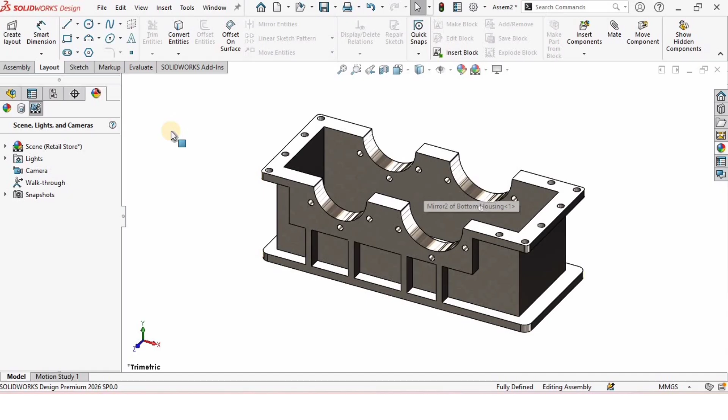So let's begin. Open a new assembly file, then go into the directory. This directory will automatically get open. You have to go into the folder where you have saved all the parts and place this bottom housing here. Then go to assembly and select insert component, select the top housing, and place it over here.

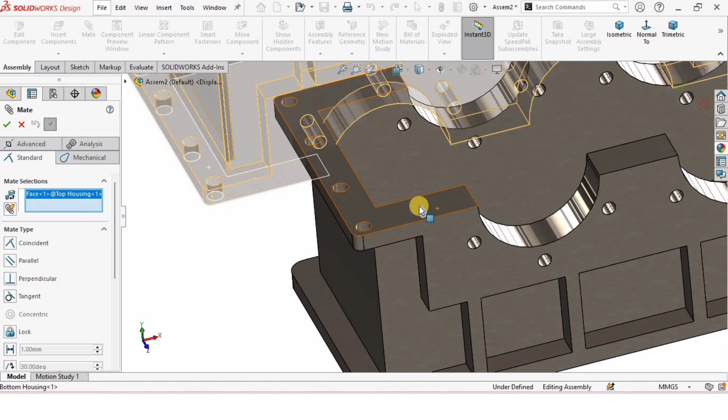Now let's assemble these housings. Select the mate, and then I will select this bottom side of the top housing and this top side of the bottom housing, and check the box.

Now let's assemble from the side like this and from the other side. So I will select these two sides and check the box. As you can see, they are perfectly assembled, and they really depend on the smaller side and the bigger side, which I have talked about in our previous tutorials.

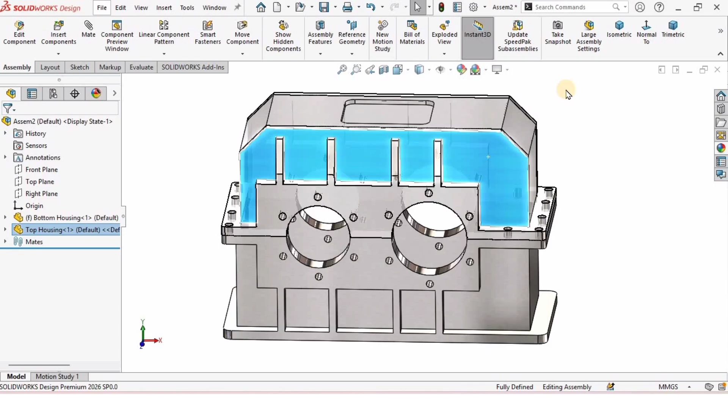So I will hide the top housing, and if for example you want to reappear it, you can show it like this, but I will hide the top housing from here. Then select insert component again, and this time I will select the input pinion shaft.

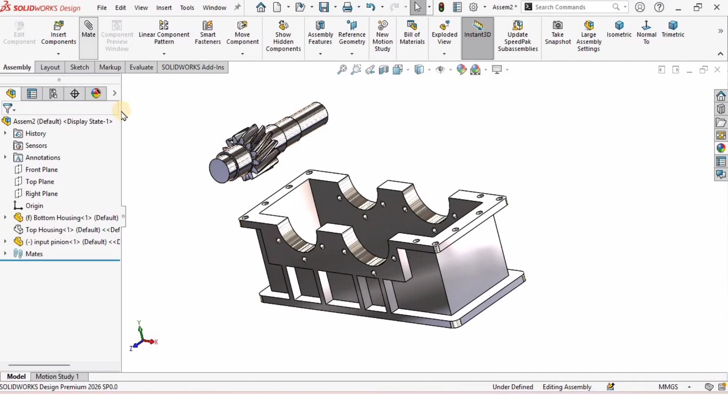If you want to rotate it about the y-axis, x-axis, or z-axis, you can rotate it like this. Otherwise, if you don't want to use those axes, you can use the rotate component option.

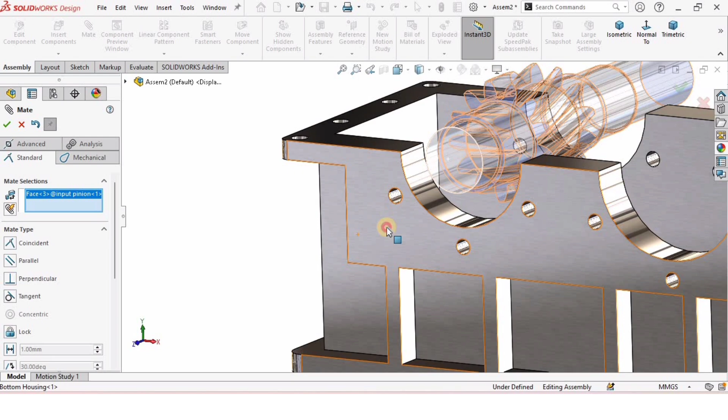Now select the mate, make sure this is clear first, then select this one and this surface, and check the box. Now we have to fix one side of the shaft with one side of the body of the housing. So I will select the smaller side of the shaft face and this side of the bottom housing, and check the box.

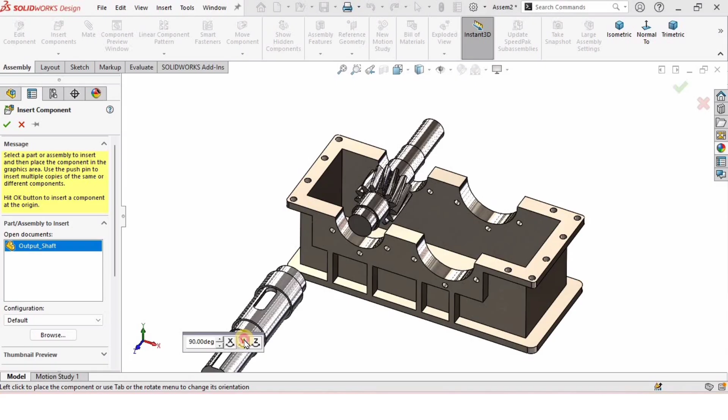Now insert component again, and this time I will select the output shaft and click on open. The output shaft will be assembled on the bigger side of the bottom housing, so you can rotate it like this. Make sure the orientation is correct, with the output shaft on the bigger side and the input pinion on the smaller side.

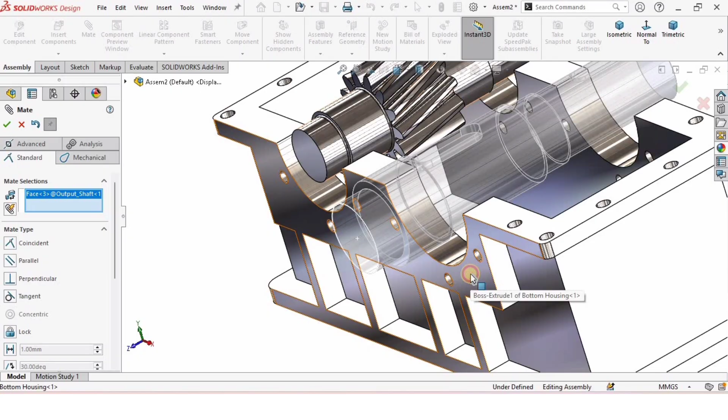In mate selection, select this surface of the shaft and this surface of the housing, check the box, and similarly select this face of the shaft and this face of the housing, click on mate, and check the box. So they are assembled now.

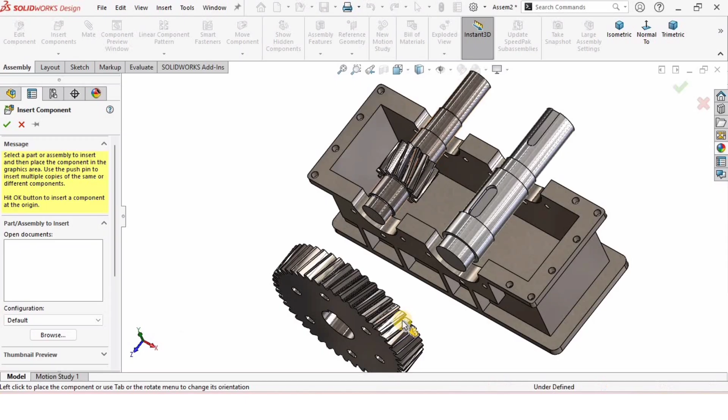Again I will select insert component, and I will insert the output gear. As you can see, this is the part file. Click on the open button. You can rotate it using the Tab key, or use the rotate component command as explained earlier.

Select the mate, and in the mate selection window, make sure this is clear first, then select this surface of the shaft and this inner surface of the gear, and check the box.

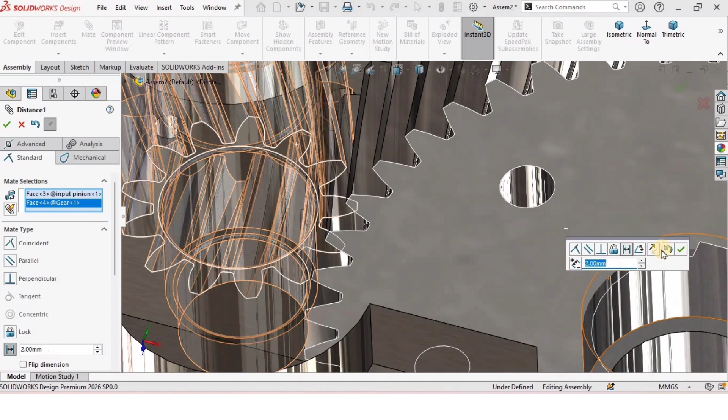Then I will select this face of the pinion and this face of the gear. I will select distance mate here and specify the distance as 2 mm, as you can see from here, and then check the box.

So they are assembled. We only need to apply the gear mate. So select the gear and you need to select the normal to option. Then move the gear so that they are not colliding. As you can see, there is a gap between the teeth.

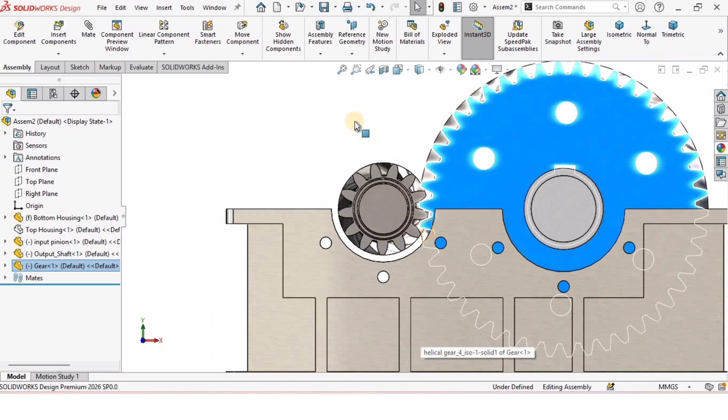After that, rotate it like this, select mate, go into mechanical mate, select gear mate, make sure this is clear. First I will select this face of the pinion, as you can see from here, one selection, and the second selection is this face of the gear.

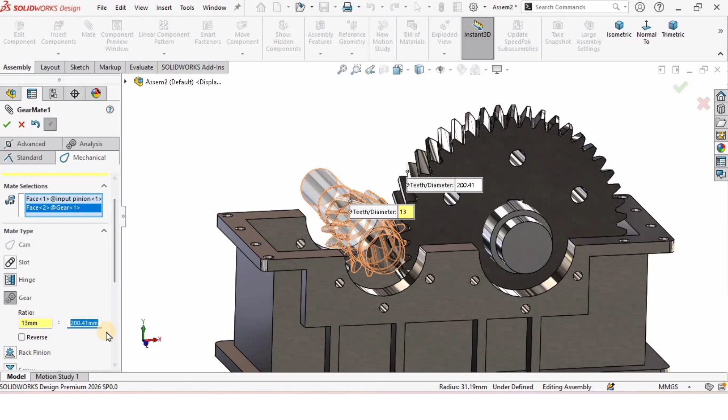Then come down a little bit, and if you have selected the pinion first, you need to specify 13:46 here, and check the box.

When you rotate the gear, let me rotate it, they will rotate together. The pinion and the gear are now rotating together, which means the gear mate has been successfully applied.

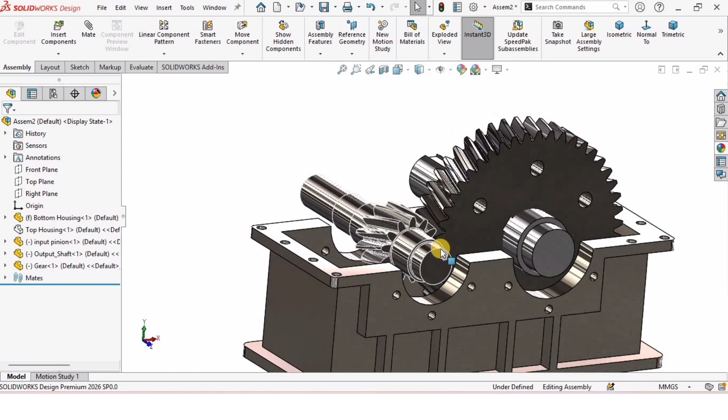After that, now let's assemble these correctly. So I will select the mate and go inside advanced mate, then width mate. In width mate we have two selections.

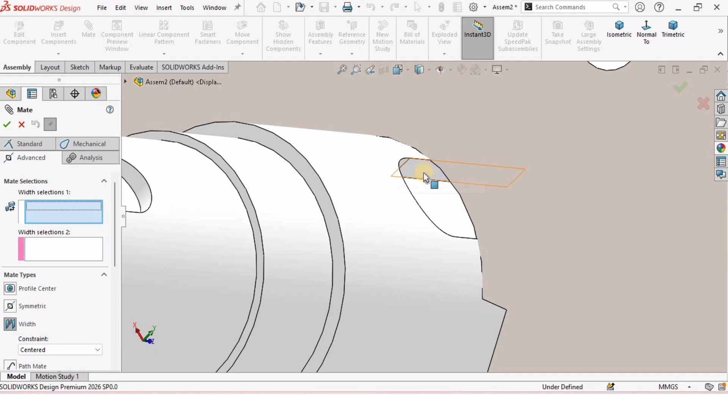The first selection, I will select these two faces of the shaft keyway, as you can see from here, and then I will select the keyways of the gear side, and check the box. As you can see, they are correctly assembled. If I rotate the gear, it will rotate perfectly along with the shaft.

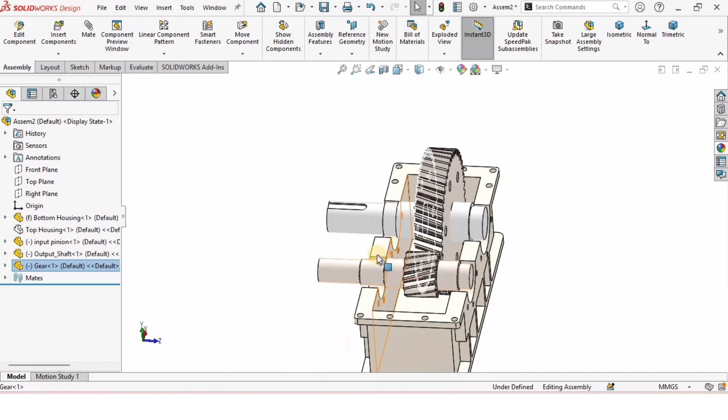Now let's go to the toolbox, select add-in one, then go into DIN because we want the bearings. Select the bearings from here, select the ball bearings, and I will drag the radial contact ball bearing. First I will select 6207.

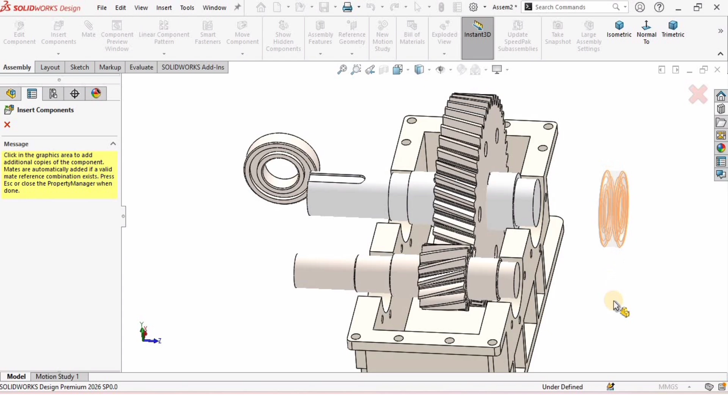I will find the size from here, 6207, and it really depends if you want to change any option. I'm not going to change any. Another bearing will automatically appear, so you need to place it over here, then press escape.

After pressing escape, now let's assemble the shaft with the bearing. So I will select these two circular surfaces of the bearing and the shaft, then the inner wall of the housing and this face of the bearing to get assembled properly.

Similarly, I will select the inner circular surface of the bearing and the outer surface of the shaft, and I will assemble it like this with the wall of the housing.

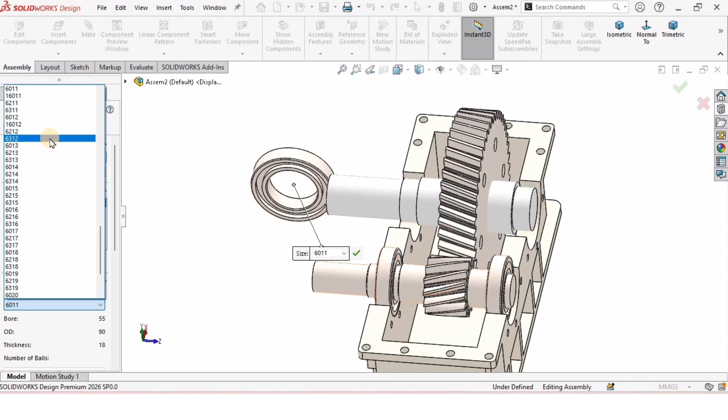Okay, now as you can see, they're working properly. Again, I will select the bearing and drag the same bearing here. Just I will change the number, so this is going to be 6011 this time.

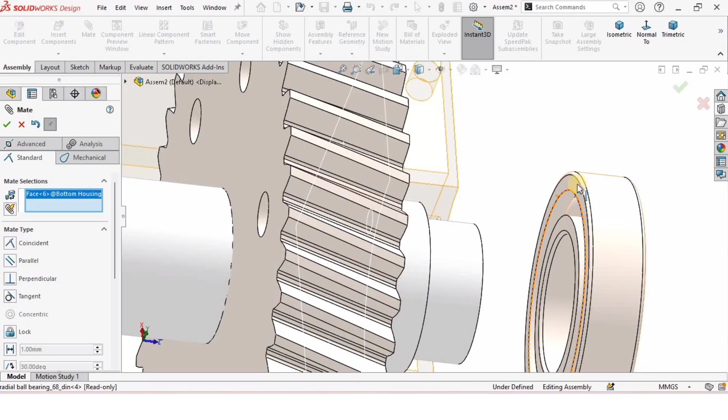Then check the box. We want another one, so it will allow us to place another one. Then I will press the escape button, select the mate selection, and similarly assemble the bearings with the output shaft. I will select this outer surface of the shaft, inner bore of the bearing, then inner wall of the housing, and this face of the bearing.

To get things assembled properly, after that I will cross this window from here. Now as you can see, all of these things are working properly.

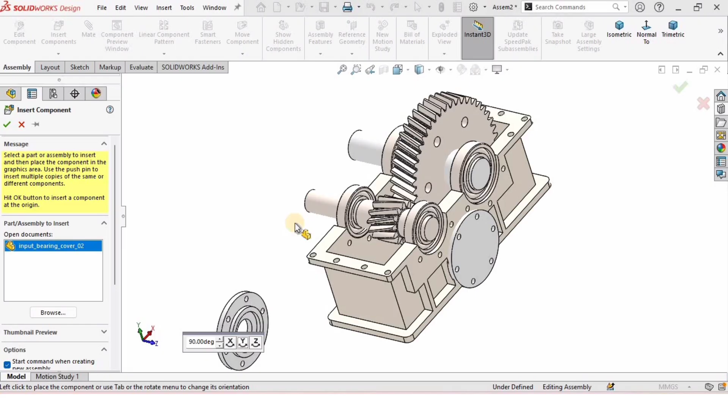Now I will select the insert component again, and this time I will select the two things, input bearing cover number 1 and 2. I will rotate it as per this y-axis and place it over here. For my first click, the first cover will be placed, and on my second click, the second cover will be placed. Or you can either place it one by one, it's up to you.

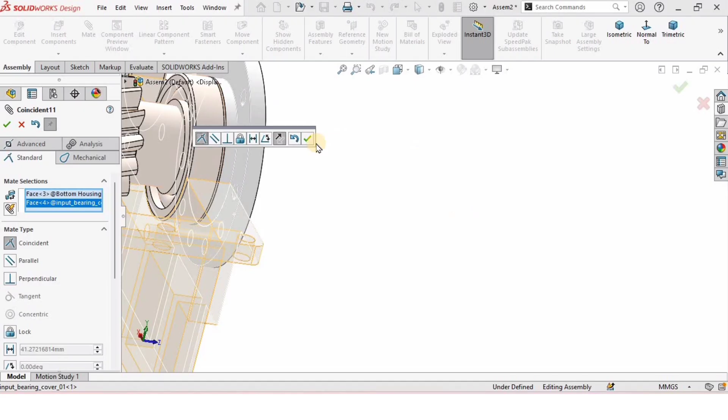Then select the mate and then select the circular surface of the shaft and the circular surface of the bearing cover. Then I will check the box and move it away. I will select this surface of the housing and this surface of the cover, and then again check the box. So they're assembled.

I will rotate the cover a little bit, then in order to properly assemble it, I will select this hole for the housing and the inner surface for the cover, and check the box. Now let's assemble the other cover.

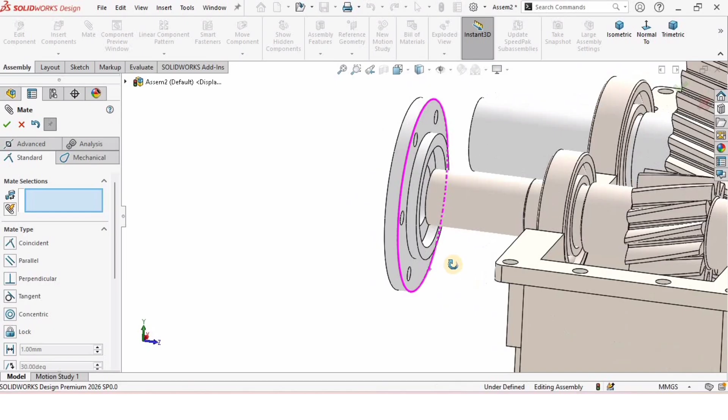It's going to assemble almost the similar way. This surface of the housing and this surface of the cover, and then check the box. This is assembled properly. Just one more mate is required, similar to the other one, the inner holes, so that they have proper alignment.

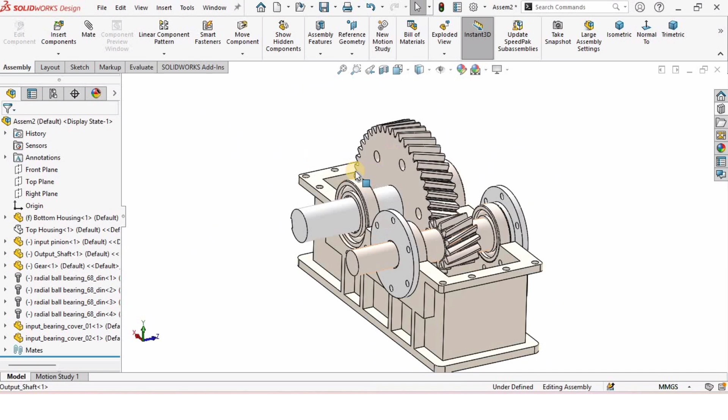Okay, and now it's time to assemble the output bearing covers. So I will select the insert component button. I will select these two output covers and place them first here in the environment. I will use this y-axis for the proper rotation.

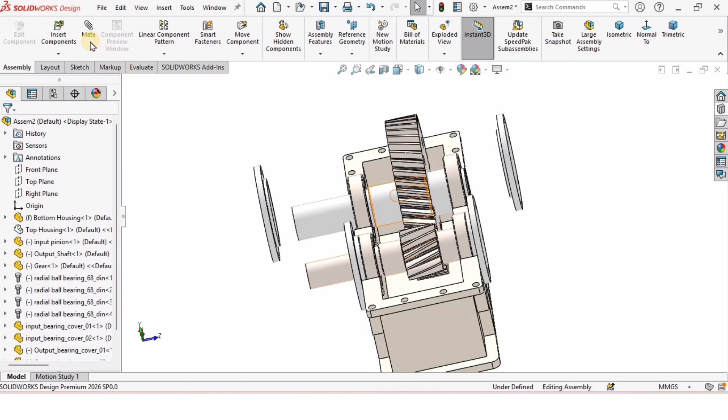Similarly this one as well. Now let's assemble both of these. I will select the mate. So in mate selection, I will select the circular surface of the shaft and any circular surface of the bearing cover.

Very much similar to what we have done previously with the input covers, I will assemble the output covers.

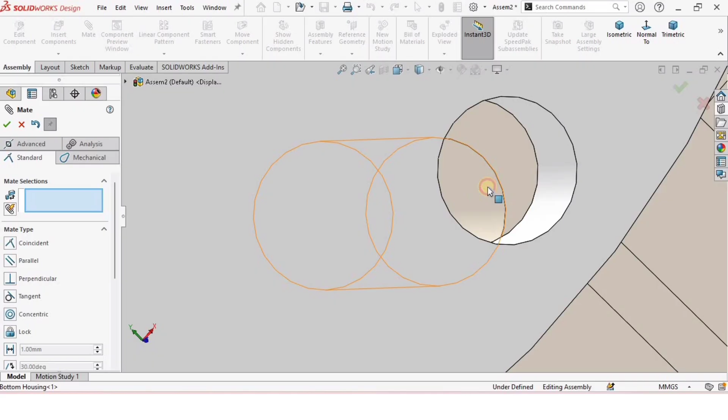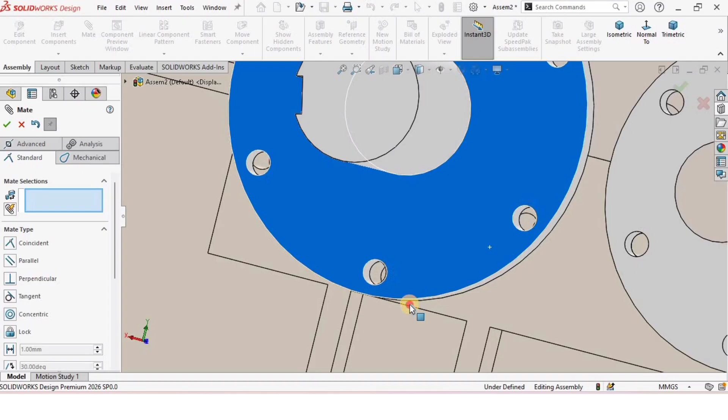Okay, now let's move on to the final cover, and let's assemble these. First select the circular surfaces and then select the faces, and for proper alignment make sure that the holes are correctly aligned so that these covers can be fixed with the bolts properly with the housing.

Okay, so they're properly assembled. Now let's unhide, or you can say show, the top cover. Let's turn on the real view graphics if you have it.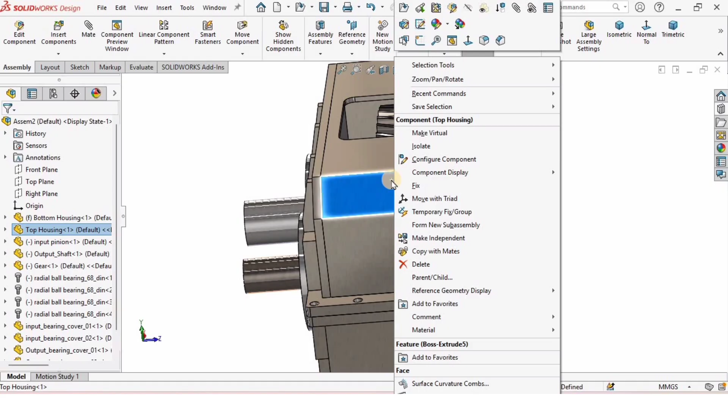Now let me make it transparent. The top cover I want to make transparent because I want to show the moving gears, but I also want to show the top cover as well. So now let me save it first, I will save it here as gearbox assembly.

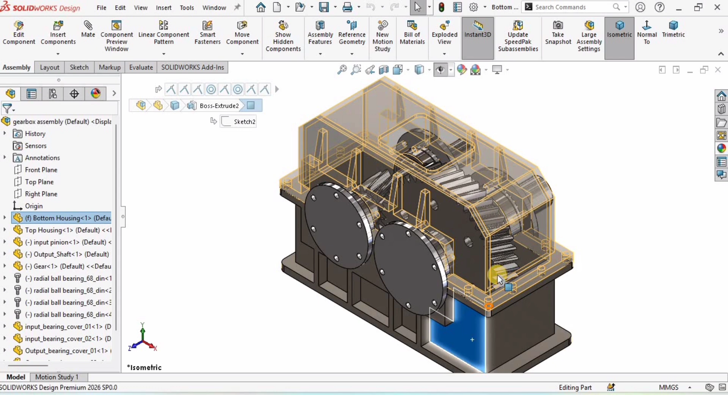And even at this stage, if you want to change the color, you have to open the part separately. Then you need to remove the previously assigned color. I will remove this color which I have previously assigned, and you can apply any color you like. It's up to you, this is an optional thing.

If you want to apply any color, for example I want to apply this blue color, I will press Ctrl S and save it. So I will change all of the colors. As you can see from here, I have changed all the colors, and you can apply any color you like. It's up to you.

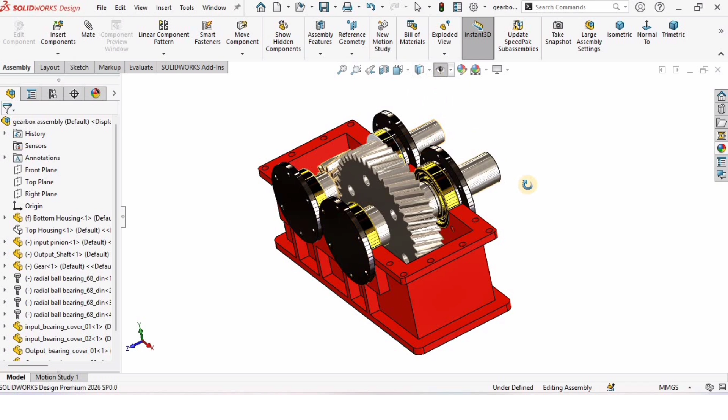But before the motion study, I want you to place the gearbox properly at the perfect orientation you want. You can rotate it, zoom in, zoom out. After you're fixed and done with that, right click here in this environment, and in toolbar make sure that the MotionManager is checked.

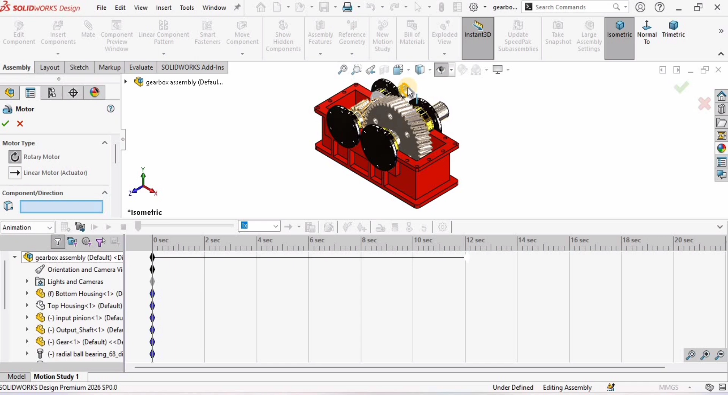You need to drag this very first tool here until 12 seconds, then select the motor option and assign the motor to this shaft. So I will click on the shaft, and as you can see the red arrow is assigned to that shaft. 22 rpm is fine for rotation.

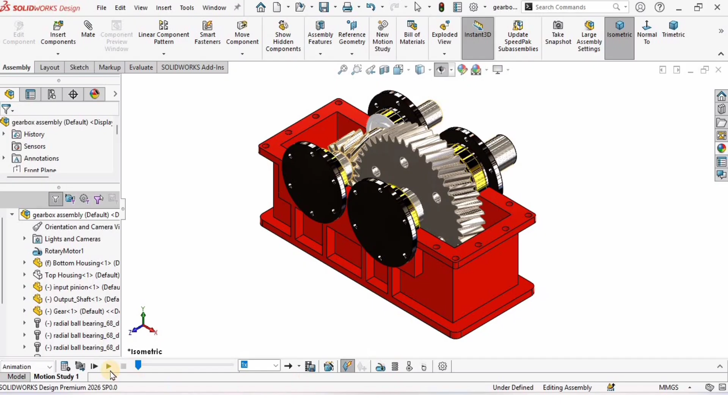Then I will drop this down. I will perfectly place it where I want to place it, because after the motion analysis, when you run this study, it will not move then. So you need to first press the calculate button, and then you can play the play button.

And as you can see from here, I will press the play button, and this is the motion for the gearbox. So that completes our gearbox series, guys.